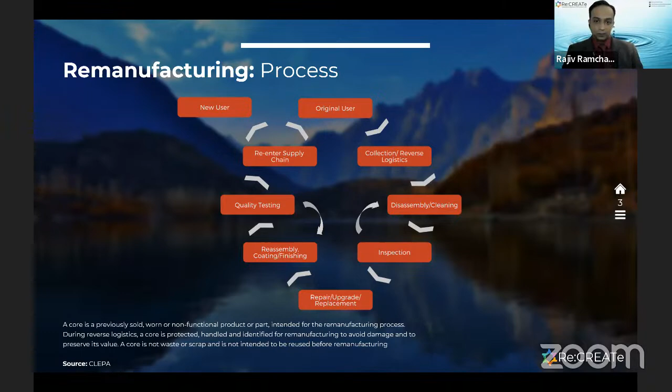From a definition perspective, and this is a definition that was agreed to by several industry associations from around the world, including the Association for Sustainable Manufacturing in the US, CLEPA, APRA, and a few others.

Essentially, it's a standardized industrial process in which cores, and by cores we mean end-of-life products, are returned to a same-as-new or better-than-new condition from a performance and functionality perspective.

It has to be in line with specific technical specifications, so it's not sort of a let's-figure-it-out-as-we-go-along way. It has specificity to it. It has protocols associated with it. You're not sort of winging it as you're doing it, which includes the engineering quality testing standards, and it yields fully warranted products.

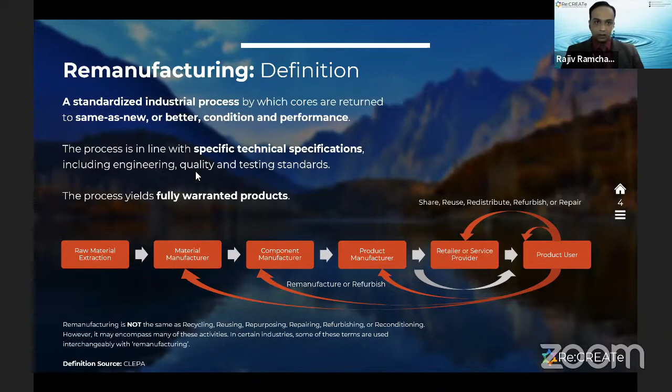As you can see, the remanufactured loop is really from the product user to the component manufacturer, or going to the product manufacturer. And then there are other smaller loops where it could stay with the user through repair or refurbishing or redistribution and go to other users, or some kind of work to give it a little bit more life, but not necessarily all the way to the point of being remanufactured and giving it a full life.

To be able to remanufacture a product, there's some criteria that need to be met.

This is a list that was put together by Boston University a number of years ago, and certainly this is a very broad list, speaking in general terms. So obviously, depending on the product, the criteria are going to vary, but broadly speaking, the technology to remanufacture the product needs to have been developed.

The product, by virtue of its design, is made up of standard interchangeable parts, which matters from the standpoint of that quality and functionality aspect.

Costs make a huge difference, right? So it has to be cost effective from a business sustainability perspective, which is to say, if bringing a core, an end-of-life product back to the industrial environment becomes the sort of inordinately expensive part of the process, then it's likely that from a financial and business perspective, it's not going to be sustainable in the long term.

So economies of scale certainly matter there, but also the design of the overall system, whether it's the nature of the reverse logistics system, the technology and transportation systems used, and the relative location of reverse logistics hubs compared to where cores are generated and where the industrial facility is. All of those factors come into the picture.

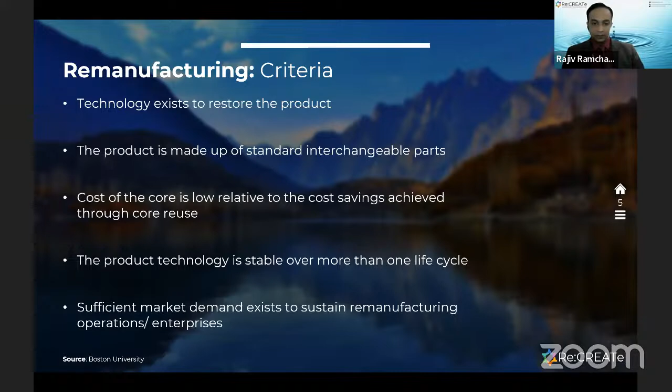So which industries undertake remanufacturing? I was at a workshop a few months ago, and we had some participants from the pharmaceutical industry, and clearly pharmaceuticals can't be remanufactured. It's something that's consumed by and metabolized in the human body. So of course you can't remanufacture pharmaceuticals, but you can remanufacture pharmaceutical manufacturing machinery, right?

So machinery, aerospace equipment, components in the aerospace industry, the automotive industry, which is sort of the birthplace of the remanufacturing industry, consumer products, electrical white goods, air conditioners, refrigerators, washing machines, all of those things that are used in sort of common usage at a day-to-day level by consumers, not just businesses, that have motors and pumps and bearings and that kind of thing. They're all fair game for remanufacturing, including computers and information technology equipment.

And this is kind of a big issue that I think was briefly mentioned by one of the speakers at the inaugural session yesterday, the issue of e-waste. And again, it's design dependent, but to be able to design products where electronic circuit boards and equipment have the capacity to be utilized over multiple life cycles is going to be a huge piece of how the future of that industry is worked out and managed, especially from the standpoint of waste generation.

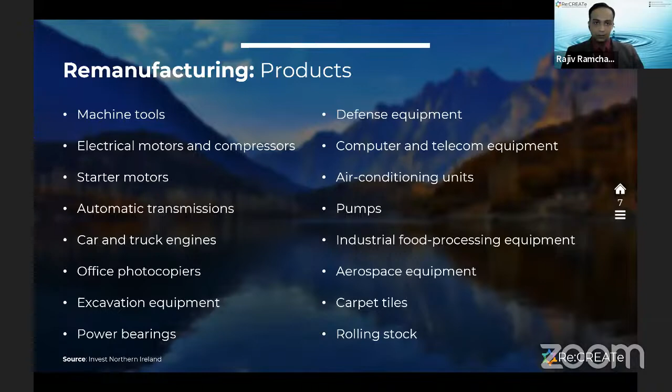So here's some of those benefits I was briefly mentioning. Just looking at it from a greenhouse gas emissions perspective, which is a front and center issue - it has been for decades, but with the pace at which the crisis is now affecting countries, neighborhoods, communities, with unprecedented temperature rises and the risk of sea level rise, this is a really big, important piece of how we think about shaping the industrial narrative going into the future. Not just 5, 10, 15 years - this kind of thinking needs to be in the 30, 40, 50, 100-year timeframe if need be.

But from a greenhouse gas impact perspective, based on studies that have been done and published in the literature, it can decrease environmental impacts of key vehicle components and result in up to a 79, almost 80% global warming potential reduction.

From a pricing perspective, remanufactured products are typically sold at 60 to 80% of the cost of a new product. Think about that - one question that often comes up is: by shifting part of your production to remanufacturing, is there a danger that you cannibalize your own product categories or market? The short answer is usually no. There's the opportunity to enter new markets, but also, with growing environmental consciousness, you're more likely to retain and grow your existing markets as well.

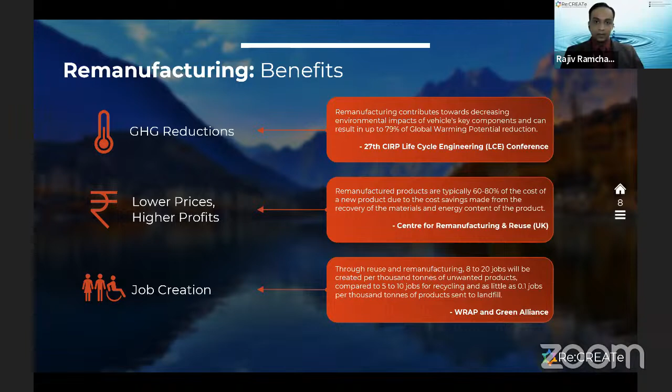So I want to be clear about drawing the distinction between recycling and remanufacturing. They mean different things, and often they tend to get lumped together as if remanufacturing is just another kind of recycling, and they're really not the same thing. There's a much greater degree of sophistication, investment, technology utilization, and labor force activation involved in remanufacturing.

As you might have guessed, there's a reduction in raw material usage, energy usage, and waste production. If you remember the diagram that showed this in the context of the circular economy, when you have a product with multiple life cycles, you're essentially not producing something from scratch, which means you're eliminating the need for raw material extraction. There's a conservation element associated with that, as well as the carbon emissions tied to the energy that goes into refining and intermediate production of materials and components. So there's a significant impact from that perspective as well.

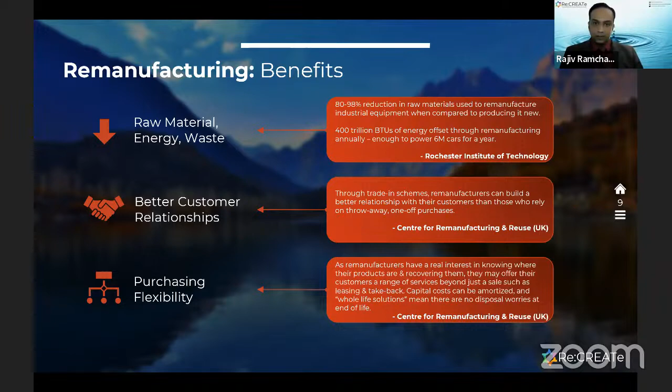In terms of customer relationships and purchasing flexibility, I can give you an example that came about as a result of COVID over the last couple of years, when global supply chains were impacted quite significantly. I have colleagues in commercial remanufacturing operations who were approached by customers essentially saying, we're stuck and need to figure out whether other products we hadn't originally considered remanufacturing-worthy could be reverse engineered - can you help us see whether we can remanufacture other products we hadn't considered before, because the supply chain is bottlenecked at the moment. So there's a real nexus that comes into the picture from the standpoint of sparking the innovation ecosystem, rethinking design, and thinking about it in terms of localization and what that might mean from an economic development and job creation perspective, etc.

So as I mentioned at the beginning, and to be mindful of time, I'm painting in some very broad brushstrokes, but I wanted to leave you with a clear sense of what remanufacturing is, and to really see it as its own thing, not to be confused with other circular economy modalities, which have their place. But remanufacturing has been around for decades now - there are even ISO standards associated with it, so it is quite well developed in various industries.

From the standpoint of its relationship to sustainability, I thought it might be worthwhile to zoom out and look at it from a broad framework perspective. There's frameworks like the triple bottom line, which talks about the economy, the environment, and society as a Venn diagram, with sustainability at the center.

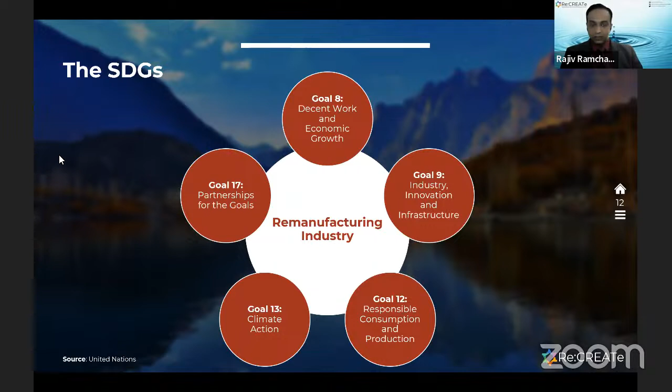Goal 9, which is industry, innovation, and infrastructure. Often goal 12, which is responsible consumption and production, is the most closely linked to remanufacturing. Certainly goal 13 on climate action, and then partnerships for the goals, which is essentially what we're here today doing—kudos to NIMT and the forum for putting this platform together so that we get to hear from each other. There's an opportunity for cross-pollination, and to see what new pathways, both from the standpoint of applied research, education, curriculum development, investment, and industry action can emerge, which are all things that need to happen, and all things that Recreate is also interested in.

From the standpoint of stakeholders, my preference, and this is the way we think about it at Recreate, is to look at stakeholders from a much wider lens. So to look at it not just from the standpoint of the private sector, government, and finance, which in the Cambridge report are highlighted as the dominant actors, but to zoom out and look at the role of academia, which is again a huge piece of this. Chambers of commerce, competitors, the general public, civil society, NGOs, regulators, which is part of the government. So zoom out and say, okay, what roles do all of these stakeholders have to play, and what's the best way to go about engaging with them?

Stakeholder mapping and prioritization as an activity, ecosystem mapping—these are significantly important steps from the standpoint of forward momentum and a clear pathway for the growth and expansion of remanufacturing in India. There's a really good report published a couple of years ago by the International Resource Panel, from the UN, titled Redefining Value, talking about the manufacturing revolution and remanufacturing, refurbishment, repair, and direct reuse in the circular economy. All of these are called value retention processes.

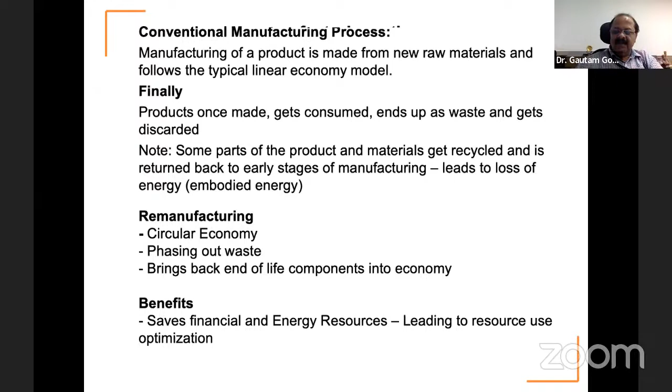But if you see the definition of remanufacturing, or the concept of remanufacturing, there are a couple of things I tried to jot down. Steps required to change the product into as new, with at least equivalent performance and warranty of new. Whatever the product is being produced as an end product, you need to work on it and then again bring it back so that it is as good as new.

Remanufacturing is an industrial process by which a previously sold, worn, or non-functional product or components are returned to a like-new or better-than-new condition. Remanufacturing exhibits an affinity to the concepts of sustainable production and sustainable society. Of course, it is sustainable, unless if we can use all the end products again back to use. The sustainability component automatically comes in, and society needs such sustainable propositions.

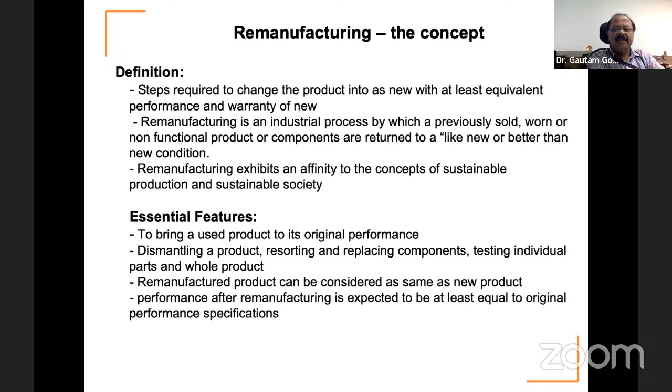What are the essential features of remanufacturing? To bring a used product to its original performance: dismantling a product, resorting, replacing components, testing individual parts and whole product. Then the remanufactured product can be considered as the same as a new product. Performance after remanufacture is expected to be at least equal to the original performance specification. That's why remanufacturing is all being talked about.

If you see the advantages of remanufacturing: it has potential to save energy over 60%, potential to save materials over 70%, water saving potential over 90%, emission reduction potential about 80%. Overall cost reduction is around 50 to 70% of the whole manufacturing process. The global warming potential index is 67% lower.

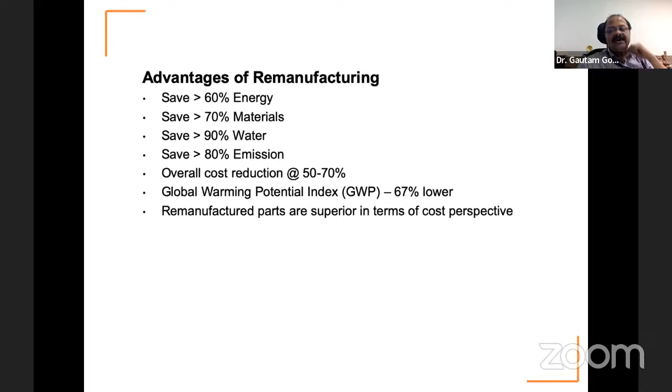This is really important in terms of climate change perspective. Our previous speaker also flagged this issue because climate change is being talked about, and our government is very committed to addressing these climate change issues, with several stringent commitments the Honorable Prime Minister has made at COP26. TIFAC is working on a decarbonization roadmap of different sectors to match the commitment made by Honorable Prime Minister Narendra Modi ji. Secondly, remanufactured parts are superior in terms of cost perspective, because when end products are reused, it becomes cost efficient. So in that context, remanufacturing has a lot of advantages.

Now let us see where India stands today in terms of remanufacturing vis-a-vis global status. The global remanufacturing component market is supposed to grow at a CAGR of 3.5%. Market size is expected to reach about $5 billion by 2027, compared to 2019, which was $3.8 billion. Several key manufacturers I have noted down include Caterpillar, Komatsu, Hitachi Construction Machinery, Epiroc, and many more.

China has already prepared a Made in China 2025 plan, which promotes sustainable and healthy development of the manufacturing industry. In East Asia, Japan exports one-third of its remanufactured product and earns high profits. If we compare India in this context, we are in a very nascent or initial stage.

Though we are in the initial stage in implementation and adoption, the Government of India considers remanufacturing as one of its priority items. This is very important. The Government of India has given a lot of thought to this. Niti Aayog prepared a report which recommended establishment of an industry body to promote the remanufacturing industry in India. So these are the two things which the Government of India has already taken note of.

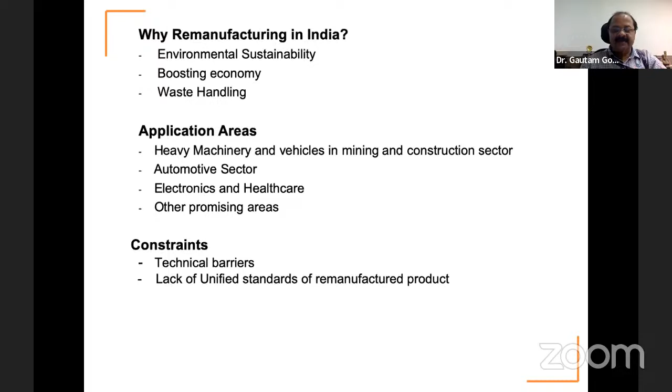But if, along with protected material, you add some restoration mechanism—using restored material, perhaps remanufacturing or replacement of old or damaged components with remanufactured components—the life gets increased. So in a way, remanufacturing has a bigger role to play here.

Now I have taken 2-3 sectors to give an example how remanufacturing helps in the industry. In automotive sector, there are a couple of examples where remanufacturing has helped companies grow. British Lister Petter company can remanufacture 3,000 disused engines every year.

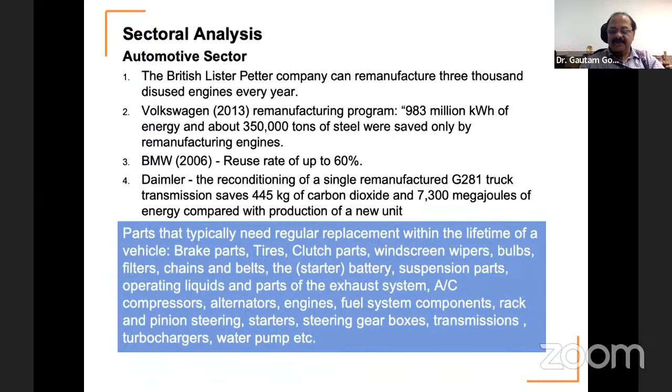If you see heavy duty machines in terms of mining and construction machinery equipment, these equipments are exposed to harsh environments. So there are damage factors of different parts: physical phenomena, chemical reactions, and biological impact. In physical phenomena, heat, force, radioactivity, etc. are the factors which damage the product. Then chemical reaction in terms of corrosion, physiochemical reaction, and biological impact in terms of biophysical, biochemical, and interaction between life forms and engineering materials. These are the factors which damage these equipments.

So remanufacturing has a potential to reduce those issues. The remanufacturing process of heavy duty materials and machinery is a complicated system which includes a series of processes such as delivering, cleaning, testing, disassembly, repairing, etc. Malfunctions or failures in these machines take considerable time to restore, so remanufactured parts provide a way to solve these issues. That's why the application of remanufacturing technologies is very important in this sector.

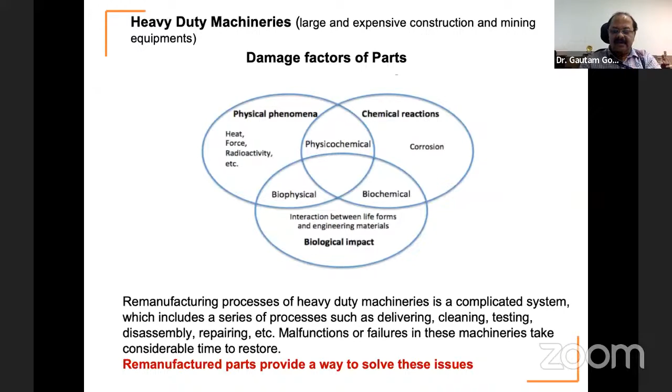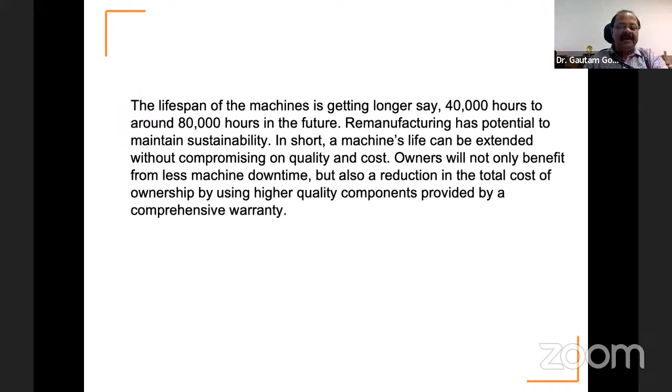If you see in a broader sense, the lifespan of the machines is getting longer, say from 40,000 hours to even 80,000 hours in the future. To make this happen, remanufacturing has the potential to maintain sustainability. In short, a machine's life can be extended without compromising on quality and cost, because through remanufacturing you can regenerate the old component into a new component of the industry. Owners will not only benefit from less machine downtime, but also a reduction in total cost of ownership by using higher quality components provided by a comprehensive warranty. So these are small interventions for the heavy industry in terms of remanufacturing technology.

In terms of electronics, the biggest challenge is e-waste management. So what is the solution? How to reuse the e-waste: reuse of device, reuse of components, shredding of materials for recovery, incineration with energy recovery of product, dumping into landfill. These are the basic solutions.

However, there are a couple of methods, techniques through which materials can be recovered from e-waste. First is repair, that is the original product used after fixing or replacing the broken or faulty parts, which is normally done in any engineering product. Then refurbishing: the original product quality is restored after disassembly to a certain level, and repairing or replacing the faulty or broken components or parts.

Remanufacturing has a bigger role over here. Basically, a new product is manufactured from an old product, recovered from disassembly of old devices, and new components. Technological upgrading may also be carried out through remanufacturing. Like this, cannibalization, recycling, energy recovery - these are all techniques that can be used to recover material from e-waste.

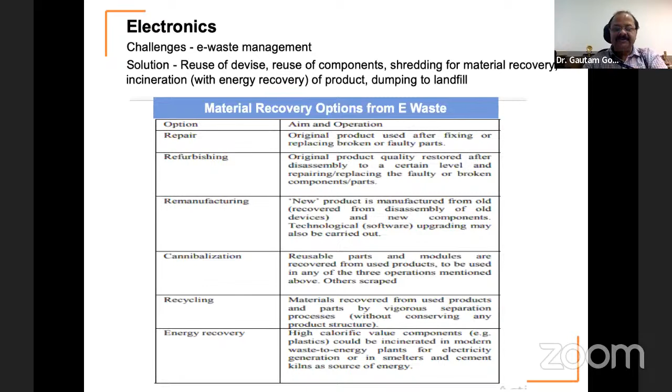Now, in short, what is the technology perspective for remanufacturing? What are the remanufacturing processes or activities? First is identification of types of damaged components - non-destructive technologies can be used for this. Identification of nature and intensity of damage - again, non-destructive technologies can be adopted over here. Elimination of damage: once damage is identified, it can be eliminated through advanced machining techniques. Determination of dimension, geometry, and integrity through surface engineering methods. These are the remanufacturing processes or activities.

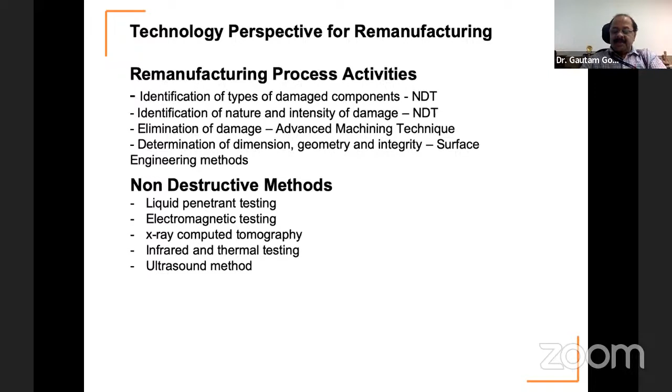But if you see in terms of non-destructive methods, there are a couple of techniques used: liquid penetrant testing, electromagnetic testing, X-ray computed tomography, infrared and thermal testing, ultrasound method. These are the methods which are used in non-destructive testing methods. In terms of advanced machining, automated adaptive machining techniques are used.

Three-dimensional scanning methods such as laser triangulation, structured light, time of flight laser scanner, and computer-aided manufacturing software are being used in advanced machining technologies. In surface engineering technologies: automated nano electro-brush plating technology, automated high velocity arc spraying technology, semi-automatic microplasma arc welding technology, automated laser cladding technology, overlay welding technology, plasma transferred arc technology, and thermal spraying for metal and non-metal coating applications.

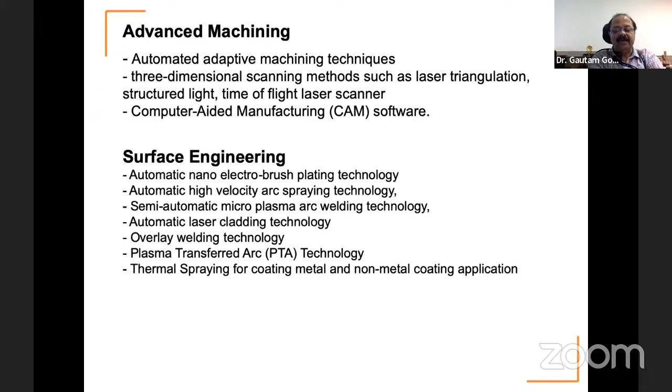I have just jotted down the technologies. I am not detailing about each and every one because I know the participants are quite well aware of them. So these are the technology perspective, and thank you very much for giving this opportunity. I wanted to give a broad view of this new area, and I'm sure that TIFAC and NIAMT will work together to take it forward so that implementation or demonstration of some of the technologies are done in India, so that it is a starting point for India to invest in this area. Thank you very much.

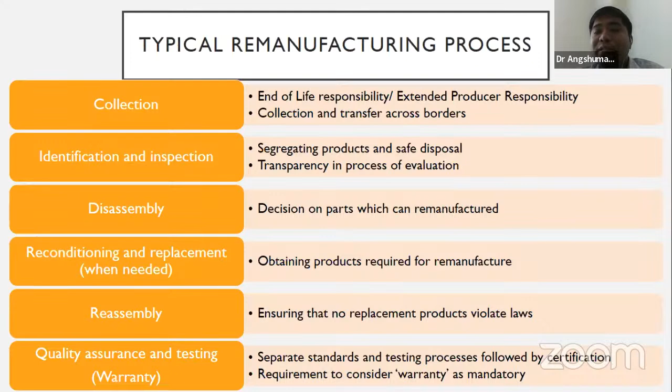Since there was a discussion in the morning where it said that warranty is generally provided, what is the exact scope of this warranty? Is it the same as the OEM, or is it a different type of warranty which is provided? So you see that throughout the remanufacturing process, there are different legal questions which arise, and most of them can only be answered if there are clear standards and clear legislation in place. But ultimately, this is what is lacking, not only in India, but in many countries across the globe.

We have already talked about the definitions in the morning, but something we need to understand is that remanufacture does not happen in all industries, and this is something which was under focus. There are certain core areas where it happens, that is capital intensive durable products with relatively longer product life cycles. Examples are aerospace, consumer products, electrical apparatus, IT products, locomotives, machinery, medical devices, vehicle parts, office furniture, restaurant equipment, and retreaded tires.

It would not be much of a surprise to say that in almost all of these industries, there have been a lot of litigation between consumers who want the right to repair or remanufacture the products, and the original equipment manufacturers who do not want to provide such a right or want to have such exclusive rights.

But it is not that discussion has not happened at all at the global forum. In 2008 itself, the World Trade Organization discussed how we can promote remanufactured goods. So there was an idea right in 2008 that we need to promote remanufacturing, and there was a discussion on how this could be promoted, and we'll look into it in the next slide.

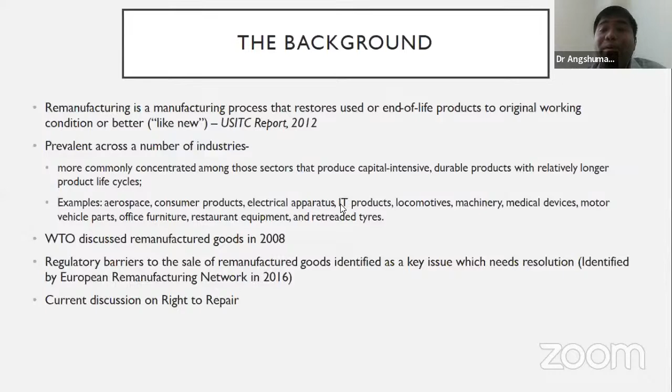This problem has also been identified, the fact that there are issues regarding regulatory standards, in developed economies, particularly the European Remanufacturing Network, which works under the aegis of the European Union. They say that regulatory barriers to the sale of remanufactured goods has been identified as a key issue which needs resolution. So the picture is not yet black and white and needs further discussion.

To provide you the complete picture, it's not that there are no standards at all. Globally, in developed economies particularly, there are certain standards which define what is remanufacturing. Of course, there are the British standards which are based on ISO 8887-1 and 8887-2, and they basically talk about remanufacturing and provide a definition of what exactly is remanufacturing. But we'll not look into the details of it.

In the USA, which is probably the market leader here, we have something called the Reman Standard, which has been developed by the Remanufacturing Industries Council. Remanufacturing has also been embedded in the domestic law of the USA. What has happened is that particularly for locomotives, that means railway engines, they have included ideas on how these could be remanufactured. Plus, in terms of environmental protection law, they have included remanufacturing as a specific process which needs to be regulated and which can help in environmental protection. So yes, in the USA and in UK, there have been steps taken to basically codify the definitions to aid the industry.

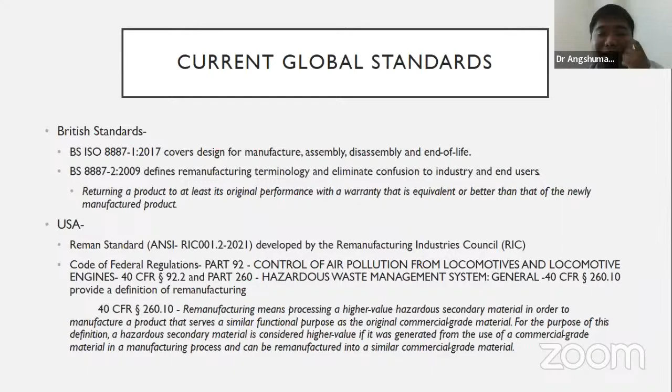I mentioned about the WTO. So way back in 2008 and 2009, the WTO members, of which India is also one, and most of global trade happens between WTO member countries, they also looked at remanufacturing. And they came up with a temporary definition. So it's not the final definition, it is a temporary definition. The document which is published itself says that there's a temporary definition which will go through a relook.

They came up with a three-part definition, which I think is most apt to identify the situation. They say that remanufactured good means something which is entirely or partially composed of parts that have been obtained from disassembly of used goods and have been processed, cleaned, inspected, or tested to the extent necessary. They are in original working condition and has a warranty. So the global standards have been taken up by the WTO members as well, who feel that this is something which needs regulation and promotion, particularly in the current scenario.

In India, however, the discussion on remanufacturing has been scattered.

Historically, if you go back to the 1970s and 1980s, there are a lot of cases in Indian courts related to taxation of goods. These cases debate whether goods should be taxed as remanufactured goods separately, or taxed as repaired goods. This has been discussed by the courts since at least the 1970s.

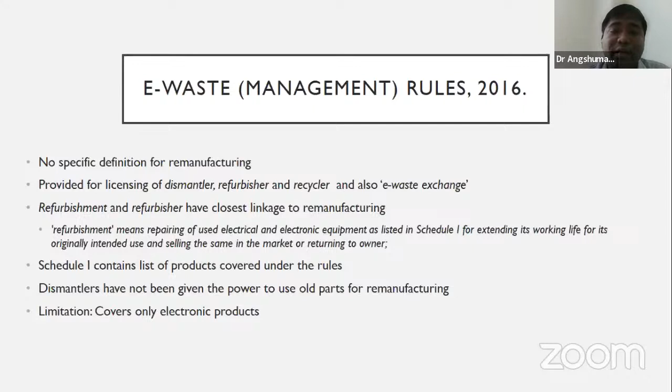So if you want that your electronic product is remanufactured, probably it will only be remanufactured if it goes to someone who has taken a license as a refurbisher. So if someone has taken a license as a recycler or dismantler, probably it will not be remanufactured. So that is a limitation which is there in the rules at the moment.

Okay, now let's come to the hottest thing in the market. What is going on right now globally? So right now globally, including in India, the biggest discussion is something called right to repair.

What this right to repair basically involves is a right that people who purchase an electronic product, or rather any type of product, should have the right to repair it in any way that they want and with any person that they want. So let's say if someone purchases a mobile phone of brand X, it should not be the fact that he has to only go to the authorized service center of brand X to get his product repaired. Instead, he should be able to get it repaired by any person who is considered trained enough to do that.

The Indian government is looking at it to promote the right to repair. But one of the front runners here is the state of New York in USA, which in June 2022 passed the legislation called the Right to Repair Act, but it has not yet been implemented because the governor has not signed it. There, they tried to create a right to repair for the first time in the USA.

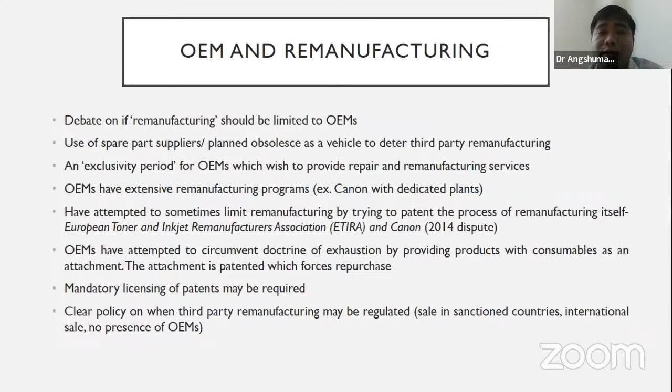Will these remanufactured products be diverted to such countries, or will this be a violation of the end user license? This is a question which still needs to be answered and debated. This needs greater clarity on how you would prevent diversion of such products to prohibited markets.

Moving towards the end, I had mentioned before that there is the Basel Convention on Transboundary Waste Management. This convention specifically prohibits cross-border trade in hazardous waste, and there is no special exemption provided for products which are going to be remanufactured in another country.

So let's say if laptops are collected in India and have to be exported to Singapore for remanufacturing, that would be a very long and complicated process. Understanding the question of what exactly can be exported or not would be a tough ask and would require multiple licenses. That has happened because remanufacturing is not defined in the convention.

So probably the only exemption you find in the Basel Convention where you would not require licenses and permits is for something called reuse, where you can repair, refurbish, or upgrade electrical and electronic assemblies. That is probably the only product which can be transported across borders without licensing and permits for remanufacture. For everything else, you'd require licenses if you collect the product in one country and want to remanufacture it in another, otherwise it might be covered by the Basel Convention.